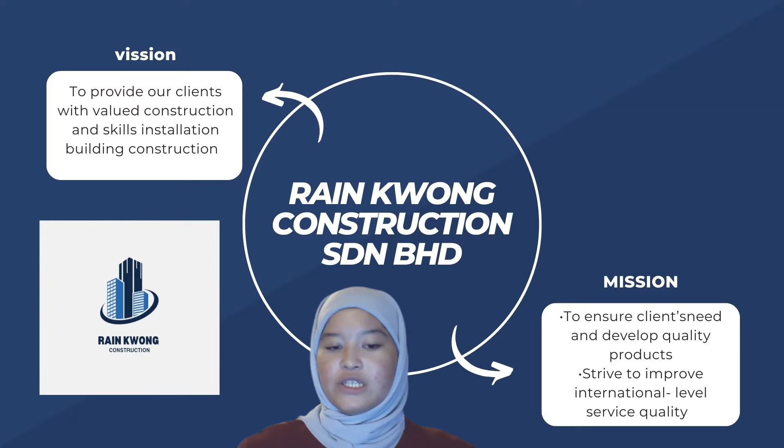Next, introduction. Our project title is the design and build of construction complex Rakan Muda at Alor Gajah, Melaka. Rain Kwong Construction Sdn Bhd, as a subcontractor company, decided to take the opportunity to join the tender opened up by JKR to take part in the construction project of complex Rakan Muda.

To design and build the building, the company must conduct a field investigation of subsoil conditions, including surveys, exploratory boring, undisturbed sampling, and laboratory tests.

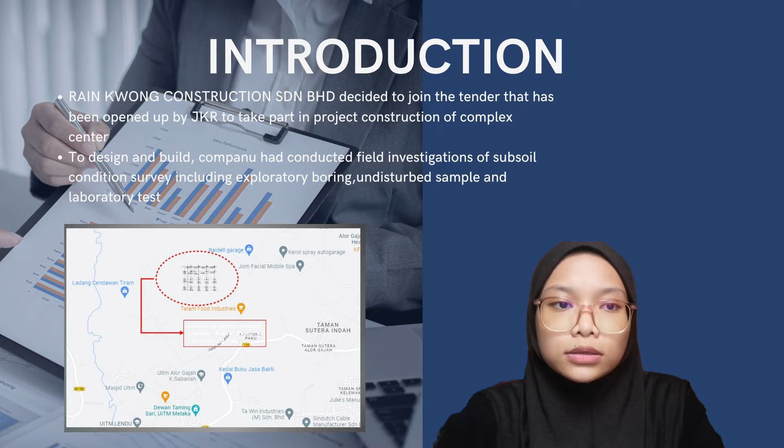Next is location. The complex Rakan Muda is located in Alor Gajah, Melaka, and the selected location is strategic. Next is analysis of data.

Analysis of data is important for soil investigation analysis. Subsurface exploration is a process of identifying the layers of deposits that underlie a proposed structure and their physical characteristics. Subsurface exploration comprises several steps, including the collection of preliminary information, reconnaissance, and site investigations.

For field exploration and testing, standard penetration test (SPT), disturbed and undisturbed soil samples can be done in situ. For laboratory testing, the suitable tests to conduct are the direct shear test and Atterberg limit test.

My name is Hamiza binti Zainil, DF190111. Overall, the project contains 19 columns and only one borehole. The axial load from the column ranges between 200 kN to 500 kN. All these columns are divided into 3 groups based on the axial load. Table 1 shows the axial load from the column and Table 2 shows the group of columns.

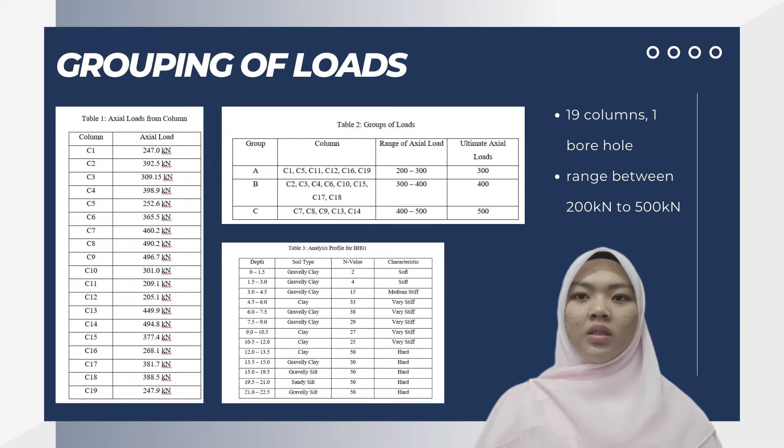Here are the analysis profiles for BH1, or borehole 1, based on the soil strata. Alright, I will continue the presentation.

A deep foundation system is one that can transfer load to a deeper area that can support the loads. The width is much smaller than the depth or length. We use a piling foundation for this project.

Basically, piles are slender structural members made of steel, timber, or concrete, usually for the purpose of providing vertical or lateral support, because one or more of the higher soil layers are highly compressible and not adequately supported, which is why we use a pile foundation. Piles are used to transfer loads from the superstructure to the bedrock beneath or to a vertical layer of soil.

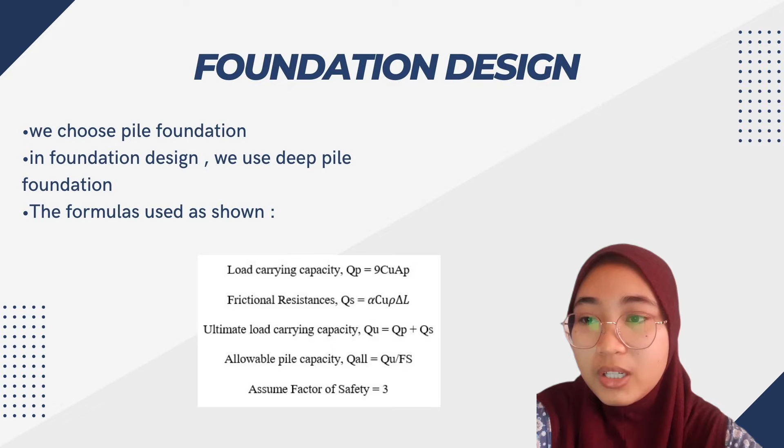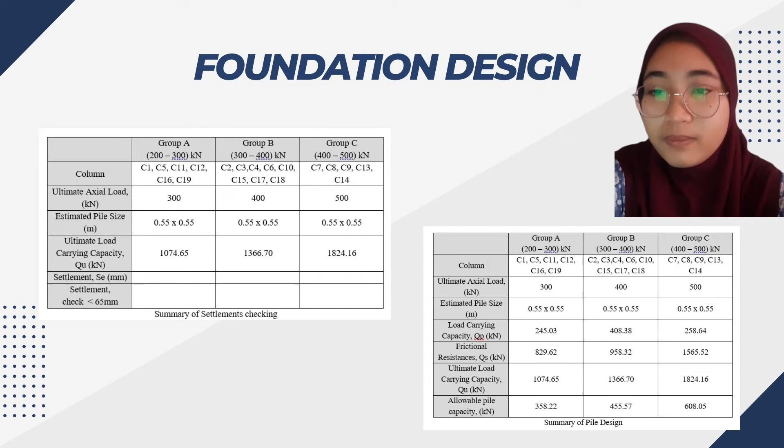Settlement in soil occurs when the total vertical displacement happens on the structure at the foundation level.

The building structure is able to settle down due to some reasons, which include overloading of the building structure, reduction in the volume of air and water ratio in the soil, inappropriate compaction or consolidation, improper design of foundation, and poor bearing capacity of the soil.

Next, this is the checking of the settlement. Settlement of foundation can be checked using the basic method formula shown below, which is SE equal to SE1 plus SE2 plus SE3.

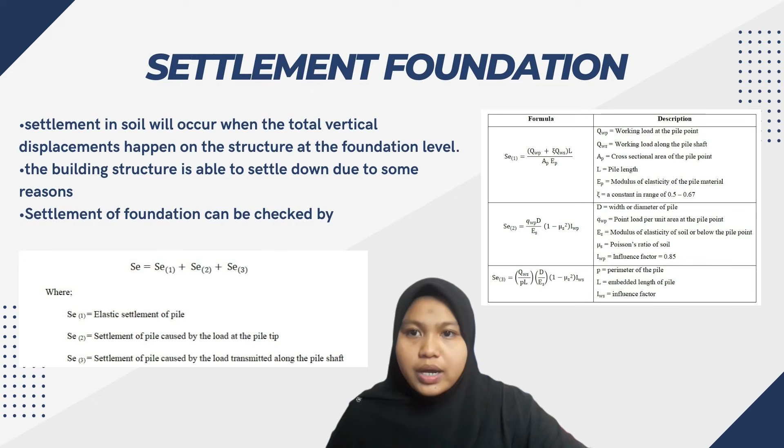SE1 is the elastic settlement of pile, SE2 is the settlement of pile caused by the load at the pile tip, and SE3 is the settlement of pile caused by the load transmitted along the pile shaft. This is the formula for SE1, SE2 and SE3.

Next is the summary of the settlement design. For group A, the settlement value is 17.2, which is less than 65, so it's okay. For group B, the settlement value is 26.7, which is less than 65 millimeter, and it is also okay.

The last one is group C. The settlement value is 20.4, which is less than 65 millimeter, and it is okay. So overall, the settlement is okay.

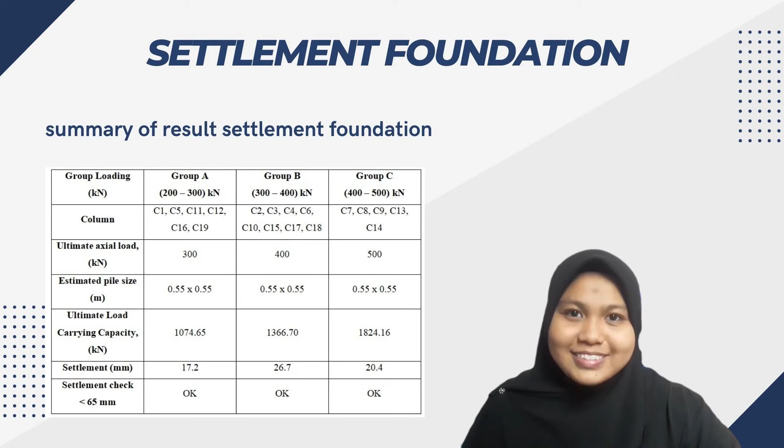The natural soil conditions in the site are not always suitable for the construction or to support the structure. To overcome these problems, soil improvements are needed to ensure the structure is safe to construct and to be used for a long period of time.

Usually, soft clay has low shear strength and low stiffness. Soil that has low shear strength leads to shear failure, and soil that has low stiffness can give impact to large deformation or settlements. The first method our group proposed is the compaction method. Compaction is the oldest and simplest ground improvement. The soil is densified by applying external pressure using rollers.

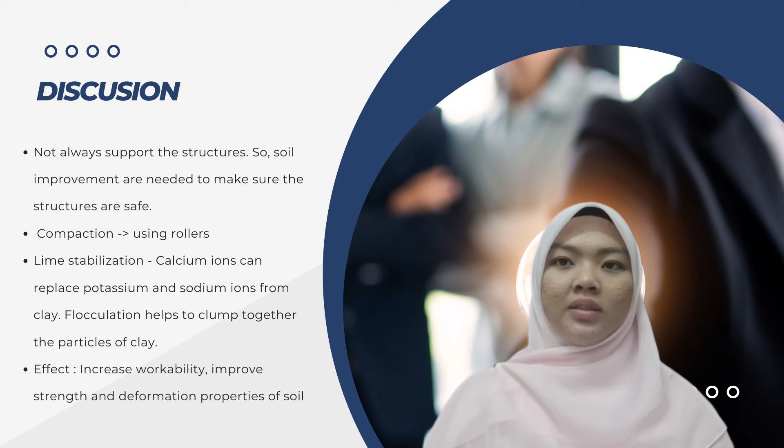The second method is lime stabilization. Calcium ions can replace potassium and sodium ions from clay, and a process named flocculation occurs to change the texture of clay soil, where the particles tend to come together and form larger particles. Hence, it will increase the workability and improve the strength and deformation properties of the soil.

For the conclusion, from structure analysis, we can conclude this project has 19 columns in total. Loads applied by the columns range between 200 kN and 500 kN. They have three category groups of columns, A, B and C, with maximum axial loads for each group being 300 kN, 400 kN and 500 kN.

Since every group has a different value of ultimate load, the load carrying capacity QP kilonewton, frictional resistance QS kilonewton, and ultimate load carrying capacity QU also differ.

So, since every group has a different value of ultimate load, the load carrying capacity QP, frictional resistance QS, and ultimate load carrying capacity QU also have different values for each group. So that's all from our group. Thank you.